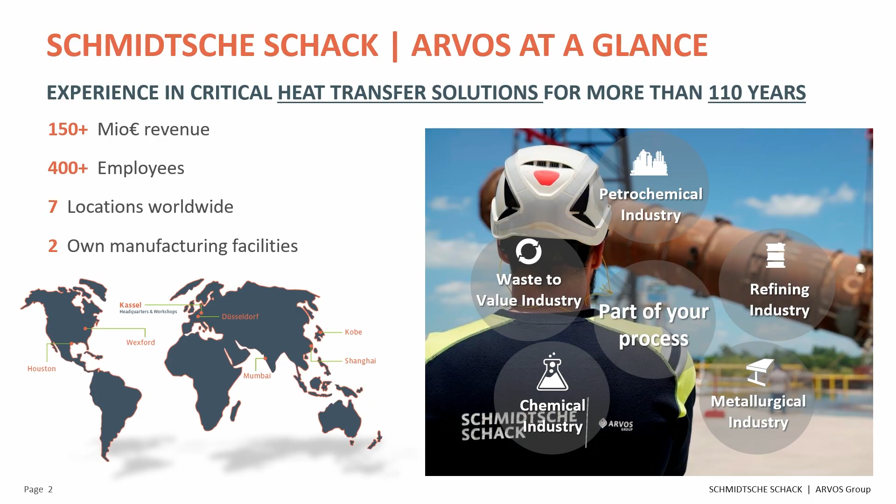office. I am 1/3 of the Houston office. Well, it's a small satellite office. We have a bit larger presence in Wexford, Pennsylvania, about 15 people there. An engineering center in Mumbai, as well as a sales office, and then sales offices in Shanghai and Kobe.

So we produce high temperature and/or high pressure heat transfer solutions in a wide variety of industries: petrochemical, waste to value, refining, metallurgical, and chemical. So it's a small part of a chemical process in a bigger chemical plant that probably makes something that definitely doesn't sit on the Walmart shelf, but it goes into something that is sold at Walmart, for example. The work that we did with CPFD on the Barracuda virtual reactor was for a piece of equipment that we sell into renewable gasification applications.

So on the left-hand side is a very high-level overview of what this process would entail. So you would take biomass or municipal solid waste and do some feedstock preparation on it, and then it would go into a primary gasifier first, and that would take that material and convert it into what I would call crude syngas. So it's a combination of carbon monoxide, carbon dioxide, hydrogen, and water primarily.

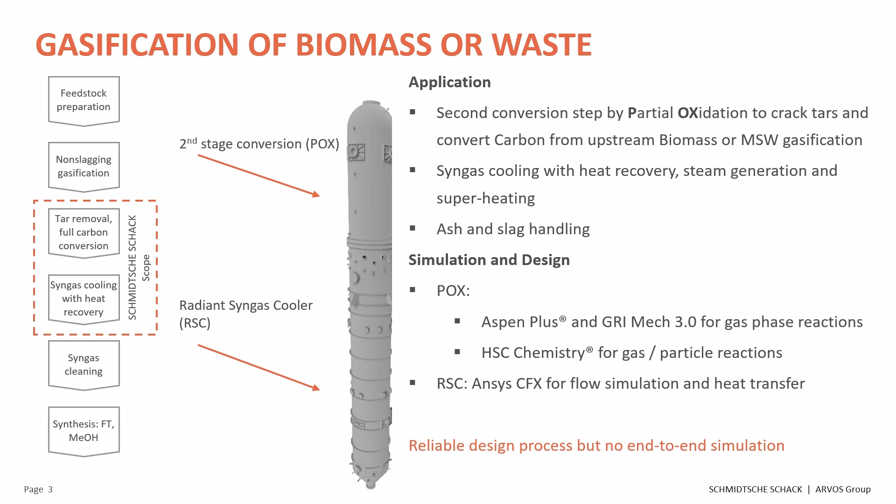So as far as the simulation side of things, obviously this is fairly complicated equipment to simulate. There's quite a few different reactions going on there. It's not just as simple as, there's a partial oxidation reaction, there's combustion reaction, there's water gas shift reaction, and then there's a whole host of other reactions going on there. And I won't bore you by listing them all, but of course, generating a model for this for our purposes and for our customer purposes is our goal, and we try to continually improve it.

On the next slide, I've got a cutaway view of that same piece of equipment. It's probably a little bit easier to envision that way. So at the very top, you have a feed injector. You have what most people would consider a flame in the middle of the POX reactor. So the crude syngas is actually entering on the side of that feed injector, and it's combined with oxygen and usually another fuel that provides heat. Some of these reactions are exothermic, but the majority of them are endothermic. So you actually need to introduce some heat there.

But you've got particles, you've got a reactive gas and syngas with all that carbon monoxide and carbon dioxide. What we're really trying to do is crack that tar and make it something usable like CO or CO2. That is much more useful for the downstream processes than tar. And of course, tar makes a really good mess too. And unconverted carbon is another unique selling point of this process. So we can actually take small carbon particles and convert them into usable carbon monoxide or carbon dioxide with this process as well.

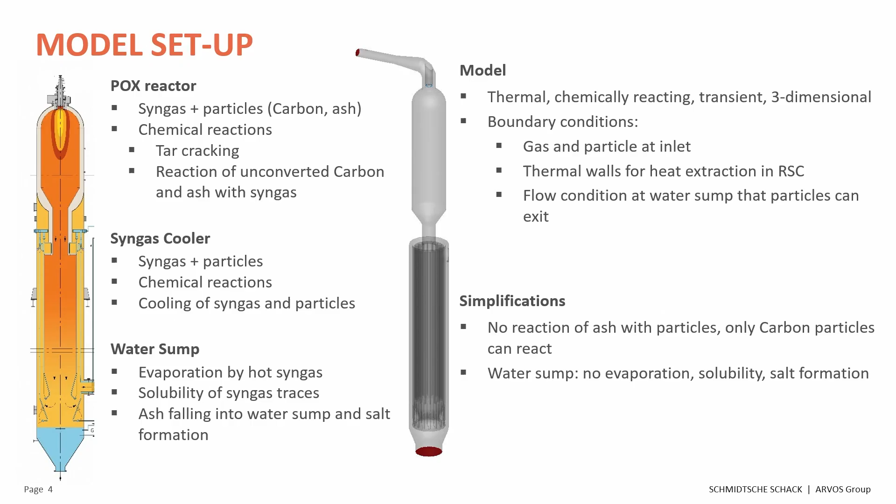You've got the thermal aspects, the chemical aspects. It's transient, it's three-dimensional. You've got gases and particulates at the inlet. You've got all those thermal walls for heat extraction. You're losing a little bit of heat out the reactor, but you're pulling it out intentionally in the radiant syngas cooler. And then you've got the water sump. So there were a few simplifications taken. They didn't really consider reaction of ash with particles. Only the carbon particulates are in the reaction for the simulation. And then they also simplified and didn't evaluate the evaporation, solubility, or salt formation on the water sump.

And then I forget, is this where we transition, Sam? Oh, perfect.

So this was a really interesting project to work on with Arvos. And the team in Germany was super knowledgeable, and they were able to help us a lot because they had some previous experience with this reaction set. And so the goal here was we have this mixture of gases coming into the vessel, and the Arvos team knew that they wanted to have this GRI-Mech 3 chemistry set implemented in Barracuda. However, this is a much larger set of chemistry than what, as far as I know, anyone has put into Barracuda before.

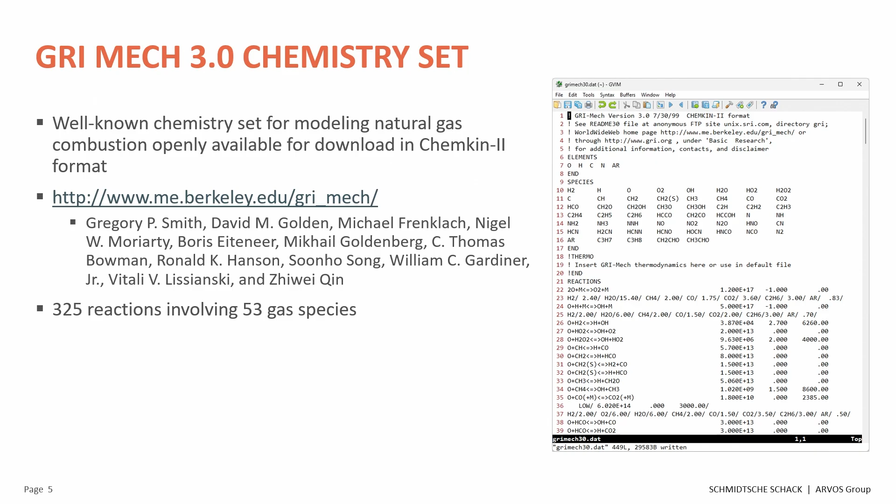So this has 325 reactions involving 53 gas species. You can download this online. On the Berkeley website, there's a whole collection of pages that are dedicated to this, and you can download it in a CHEMKIN-II format, which is kind of painful to parse if you've ever tried to do that before. And so we wanted to bring this into Barracuda in order to include it in the model.

One thing that I found kind of early on, I was starting to go down the path of writing my own Chemkin-II conversion code in Python, and thankfully my Googling led me to an open source tool called Cantera. This is a tool that can deal with chemical reaction kinetics, thermodynamic properties, material properties, things like that. Cantera actually has GRI-Mech 3.0 built into its distribution as the primary example that they use to teach people how to use Cantera. So this was fairly lucky, and I'll take the luck when I can get it.

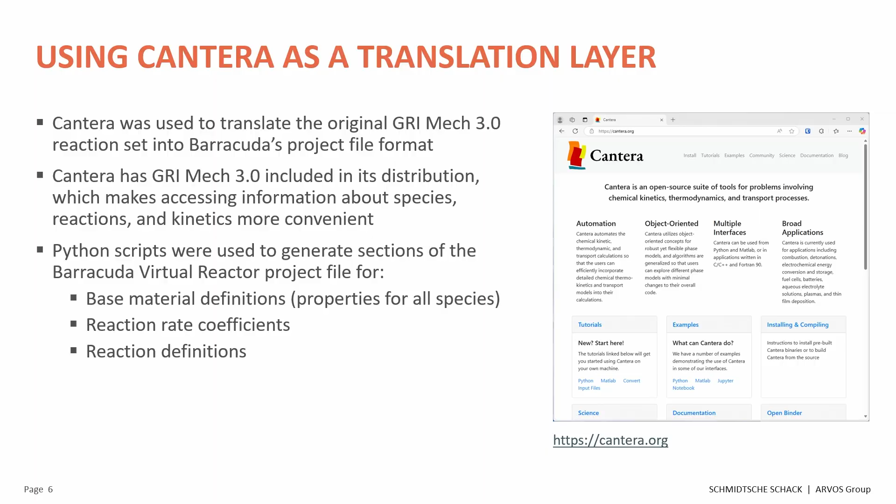What we ended up doing was learning a little bit about how to use Cantera, but then writing a set of Python scripts that could query the GRI-Mech 3.0 information and write out text files that included base material definitions, reaction rate coefficients, and reaction definitions for Barracuda. And this could be generalized to other chemistry sets too. If you have a chemistry set that you're going for and there is a Chemkin-II format file available, we could potentially use this same strategy to read that into Cantera, easily access the pertinent information, and generate the portions of the Barracuda project file.

So you don't want to enter this in by hand. It would be very error prone and very maddening. So it was nice to have this programmatic way to get this really big reaction set and put it into text file format. The Barracuda project file is basically a big text file, so you can build a project file by combining these different text files that were generated.

One thing that I always try to preach to people is when you do something crazy like this with chemistry, you should definitely run a single cell Barracuda simulation to verify this, because there's very little chance you're going to get it right on the first try. As I mentioned, the Arvos team had some deep experience with this reaction set already, so they knew what to expect under specific conditions with certain pressures, temperatures and gas compositions. So we were able to verify that we were getting the reaction rates calculated in the right way after all this information was in Barracuda.

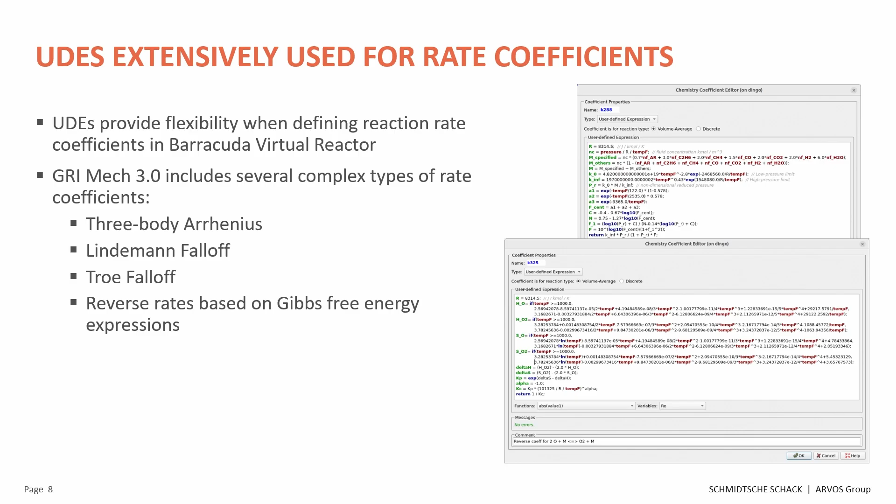The GRI-Mech 3.0 reaction set includes some tricky kinetics that would not fit into just a typical Arrhenius format. We have three-body Arrhenius, we have different fall-off reactions where above a certain pressure it behaves one way and below a certain pressure it does something different. So some complicated things. Most of the reverse rates have Gibbs free energy expressions that would not be possible to represent unless you have something like this user-defined expression language where you can put all of this into Barracuda. So it enabled us to get this reaction set in and run successfully.

One thing is that this is a very large reaction set, and it was also a large model. As you saw, it's a very tall vessel, and we needed enough cell resolution to capture the spatial gradients, so it had about 780,000 real cells. The number of clouds was somewhat low.

It was pretty dilute in terms of the actual mass flow rate of particles going through this system, so it's not a really impressive cloud count. But with all of this and running on one of our newer machines at CPFD, we were using 2 RTX 6000 GPUs in combination. We were getting about 3.5 seconds per day, and we found that we needed to run probably 40 to 50 seconds to get to a steady state operating condition. So we said, okay, we're going to set an end time of 60 seconds, and so that took about 16 days for reaching that point of simulation time.

So kind of a challenging simulation, definitely challenging to set up, but in the end, a really interesting experience and a good experience working with the Arvos team. So I think now I hand it back over to Eric.

And just to go through some of the results with you, we took a flux plane between the POX reactor and the radiant syngas cooler and compared our simulation results with the Barracuda virtual reactor simulations. And you can see on the x-axis is the simulation time, not reactor residence time. But within 10 seconds or so, it was in very good correlation on those 4 key components being hydrogen, carbon monoxide, carbon dioxide, and water.

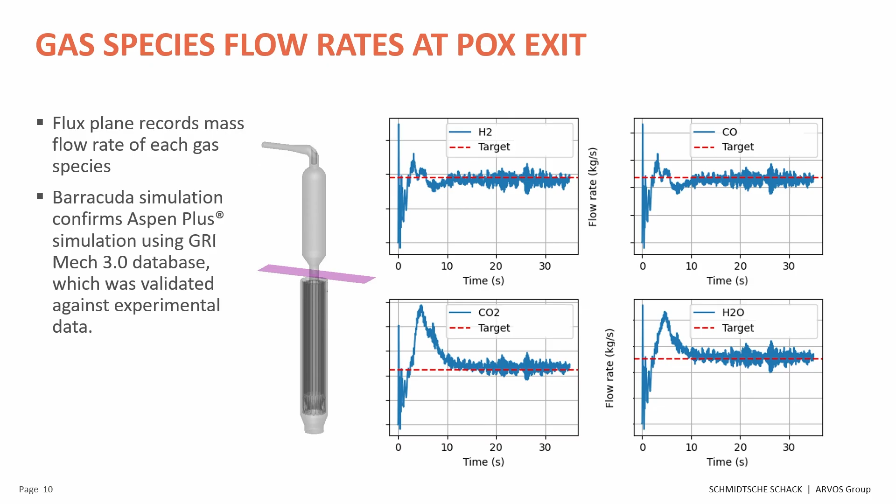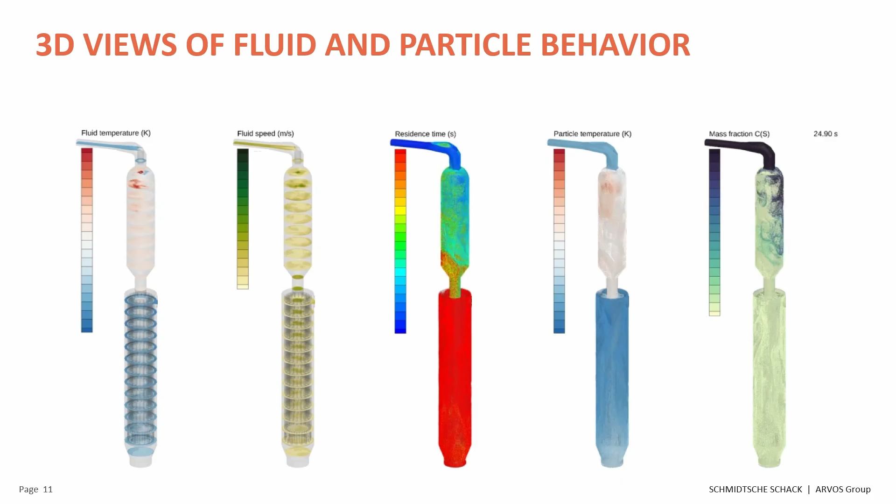On the next slide, we've got some various animations shown. So on the left-hand side is the fluid temperature, fluid speed being the second simulation. The middle one is residence time in seconds, particle temperature being second to the last, and then mass fraction of carbon being on the far right-hand side there. I think you can see that it's certainly not a very simple and idealized system that's actually going on inside there. Personally, I think it's easiest to see on the mass fraction of carbon what's going on there as far as turbulent flow and conversion of those small carbon particles.

On this slide, we're taking a look at the heat transfer in the radiant syngas cooler. There were a couple of different approaches taken there. First, they used the heat flux as a boundary condition in the radiant syngas cooler. The real area for improvement in all of this was the heat transfer, or the radiant heat transfer specifically in the top section of the radiant syngas cooler. So there was quite a difference between the wall temperature that we estimate versus what the Barracuda simulation estimated.

There's definitely some backflow that occurs in that system. It was evident in those videos as well. So you've got a fairly cool gas on the surface there, but in the A1 area, you're going to have your highest temperature. So of course you'll have your highest radiant heat transfer there. So still some areas for improvement, but overall, it was very good correlation as far as heat transfer as well, as you can see on the second and third graph there on the right-hand side and in the center as well.

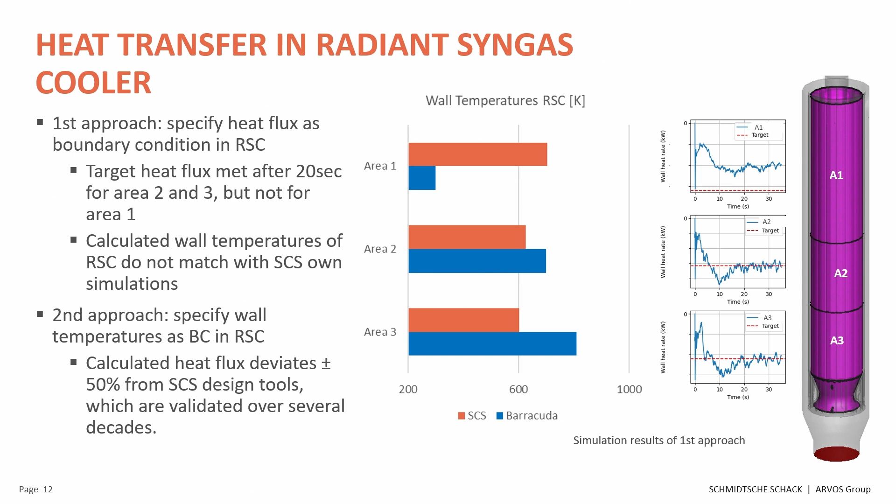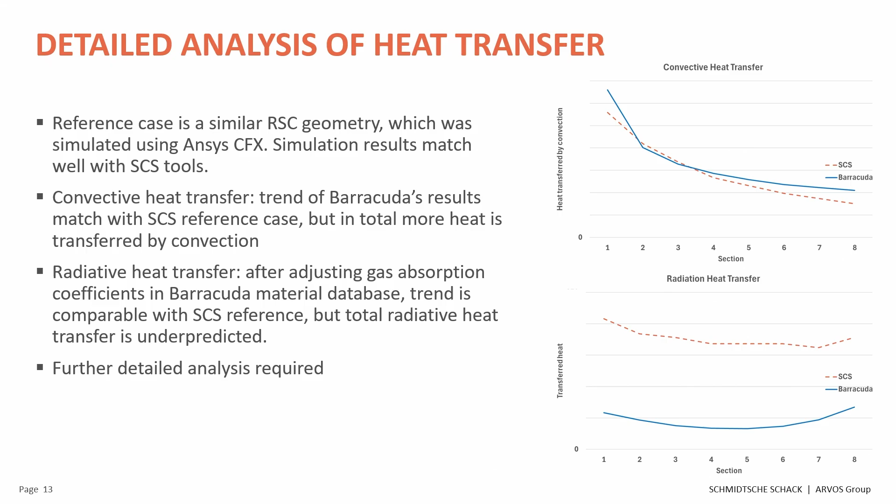So the reference case that was used was a similar radiant syngas cooler geometry that was simulated using ANSYS CFX. And that matched well with our internal tools. The convective heat transfer has the same shape, or no, pardon me, I got those backwards. Convective heat transfer, really good correlation between our tools and Barracuda tools, as you can see on the graph on the top right. As far as the radiation heat transfer, the curves are the right shape, but there is a difference between the two as far as the overall transferred heat. So there's still some work to do there, or opportunities for improvement, but hey, everybody can improve, right?

So as far as conclusions, this was the first implementation of GRI-Mech 3 within Barracuda. And on that previous slide, he mentioned 325 reactions. That was the forward reactions. There's another 309 in the reverse direction, so it's a total of 634. Way too much to be typing in by hand, of course.

The gas phase reaction results at the POX reactor outlet were very consistent with other models that we've developed and validated within our company. The reaction rate and conversion of carbon particles also was well confirmed with previous work that we had done. It also provides a better understanding of fluid particle flow and particle separation within the equipment. And the area of improvement is further work as far as the heat transfer.